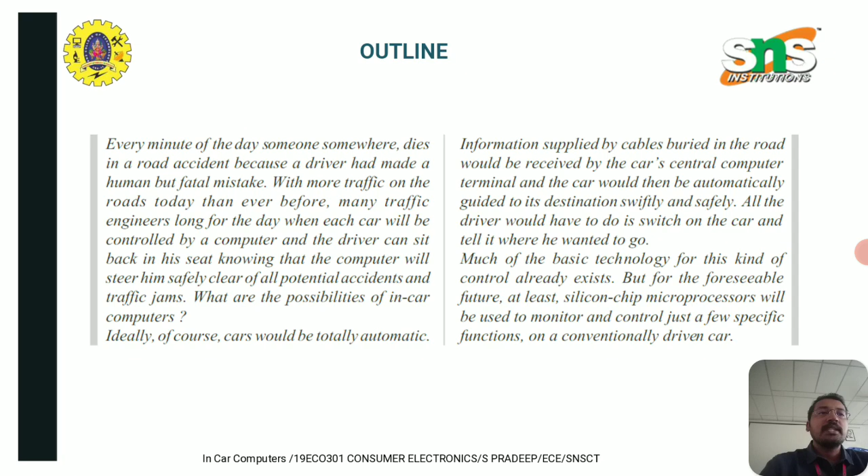Much of the basic technology for this kind of control already exists, but for the foreseeable future, at least silicon chip microprocessors will be used to monitor and control just a few specific functions on a conventionally driven car.

Applications: extended use of integrated circuits will result in electronics taking over more complex jobs in the car's command and control systems. Solid state devices contain no inherent wear out mechanisms. Because of their proven reliability, solid state devices and systems are perhaps the only practical and economical way to realize safety, environmental cleanliness, and the convenience required for state of the art automobiles.

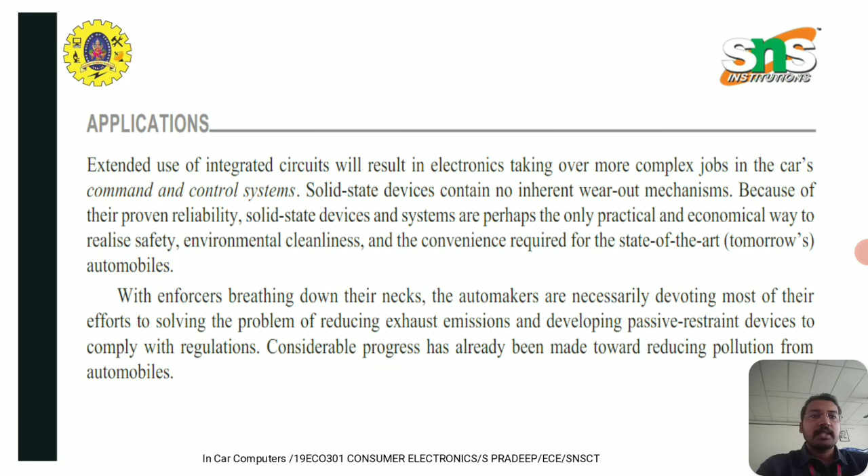Considerable progress has already been made toward reducing pollution from automobiles. This table shows possible applications of solid state devices in automobiles.

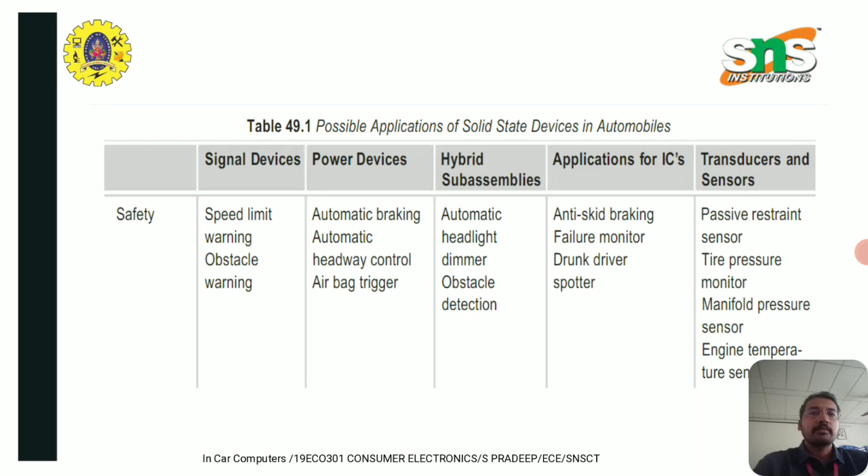This figure shows various items being offered by Ford, though not all of them are available on all Ford cars. The systems shown are all electronic.

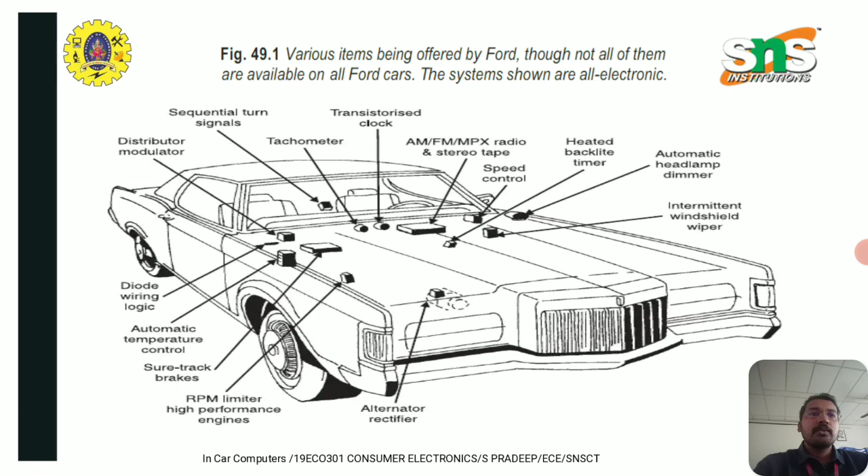This figure shows how a computer might control a car. Sensors are located throughout the car to monitor such things as oil pressure, engine temperature, and the amount of fuel.

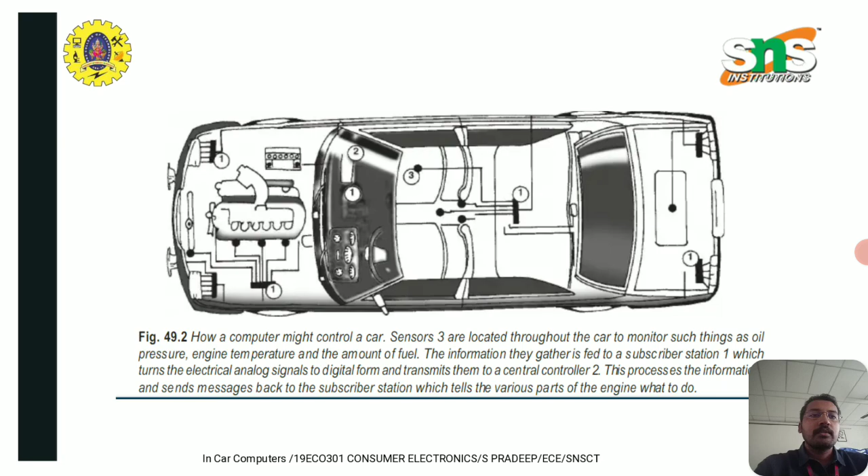A greater difficulty is avoiding the setting up of unwanted oscillations. This is because the control system forms a closed loop.

The brakes send a signal to the computer. The computer sends a signal back to the brakes telling them to ease off brake or brake harder. If the system is designed and adjusted correctly, then the difference between what the brakes are doing and what the computer wants them to do will get progressively smaller as the information and command signal messages continue.

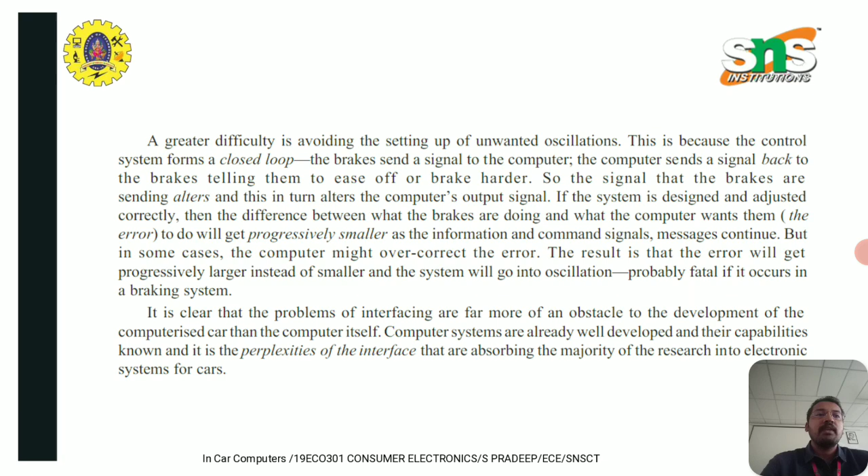But in some cases, the computer might overcorrect the error. The result is that the error will get progressively larger instead of smaller and the system will go into oscillation. It is clear that the problem of interfacing is far more of an obstacle to the development of the computerized car than the computer itself.

Electronic ignition. Development of electronic fuel supply and ignition controls has been given an extra boost by the introduction of strict laws governing the amount of polluting gases that may be present in the exhaust.

Many cars now have electronic ignition. Although most are still timed mechanically, a number of more recent systems has begun to incorporate microprocessors to improve the accuracy with which the ignition is timed to fire the spark plug.

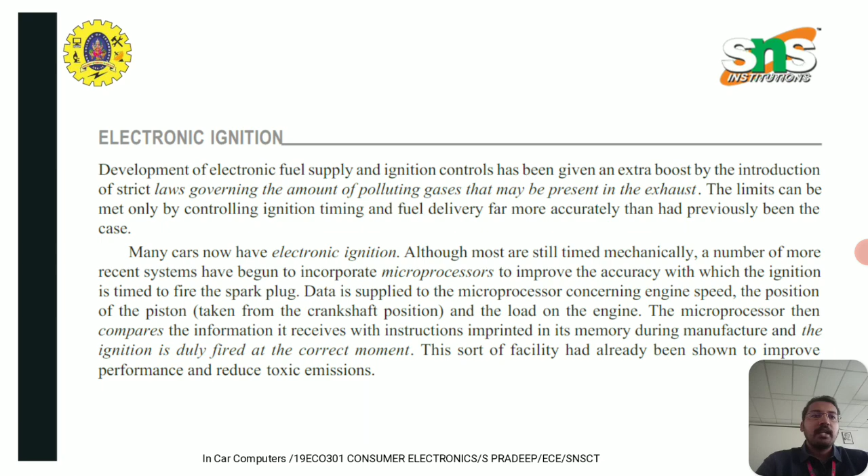Data is supplied to the microprocessor concerning engine speed, the position of the piston, and the load on the engine. The microprocessor then compares the information it receives with instructions imprinted in its memory during manufacture. This sort of facility has already been shown to improve performance and reduce toxic emissions.

Electronic operation of the engine valves opens up a further enormous range of possibilities. It would, for instance, allow the driver to change the characteristics of his engine at will. At the flick of a switch, he could change the car from a highly tuned sportster to an economical slogger with plenty of pulling power, simply by altering the time and duration of valve opening.

Electronic ignition lock system. In the electronic ignition lock system, to prevent drunken driving, the basic idea is to flash an arbitrary sequence of letters on a screen very briefly and then require the driver to punch a set of buttons in the same order.

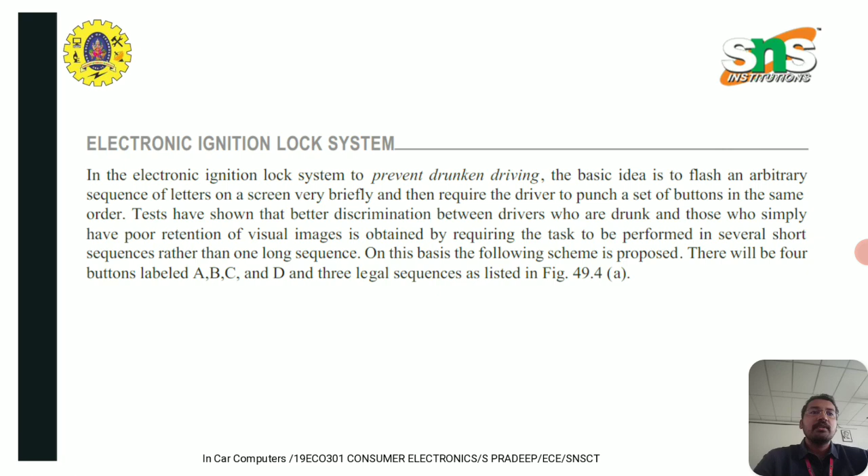Tests have shown that better discrimination between drivers who are drunk and those who simply have poor retention of visual images is obtained by requiring the task to be performed in several short sequences rather than one long sequence. This shows the example.

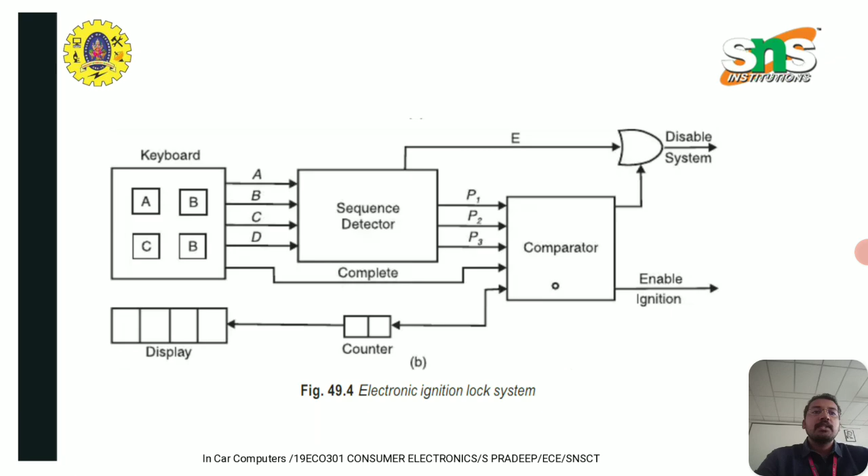This block diagram shows the electronic ignition lock system. In this, the sequence detector checks the sequence. If an error is made in any sequence, the error signal E is used to disable the system.

If a sequence is correctly completed, a pulse is issued on one of the lines P1, P2 or P3 corresponding to sequence 1, 2 or 3 respectively. The information is compared by the comparator with the number of the sequences that was displayed. If they agree for sequence 1 or 2, the counter is stepped to the next number to start the next sequence. After agreement on sequence 3, the ignition is turned on.

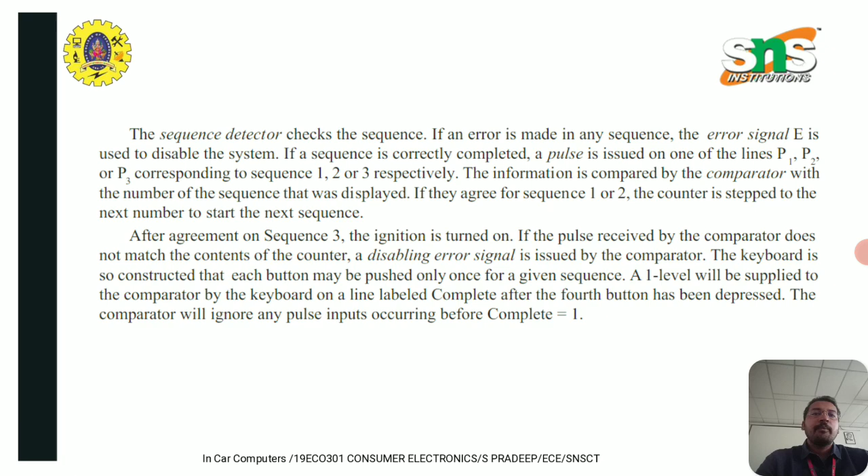If the pulse received by the comparator does not match the contents of the counter, a disabling error signal is issued by the comparator. The keyboard is constructed so that each button may be pushed only once for a given sequence. A 1-level will be supplied to the comparator by the keyboard on a line labeled complete, after the fourth button has been depressed. The comparator will ignore any pulse inputs occurring before complete equals 1.

Anti-lock braking system. The ABS is an advanced braking system which comes into play when there is a panic brake situation. The braking action with and without ABS is shown in the following figure.

In Case 1, when a part of the car without ABS is on a slippery surface and the brake is applied, the car swirls. The car with ABS stays on course. In Case 2, while taking a curve, the car without ABS goes off course while the one with ABS stays on course.

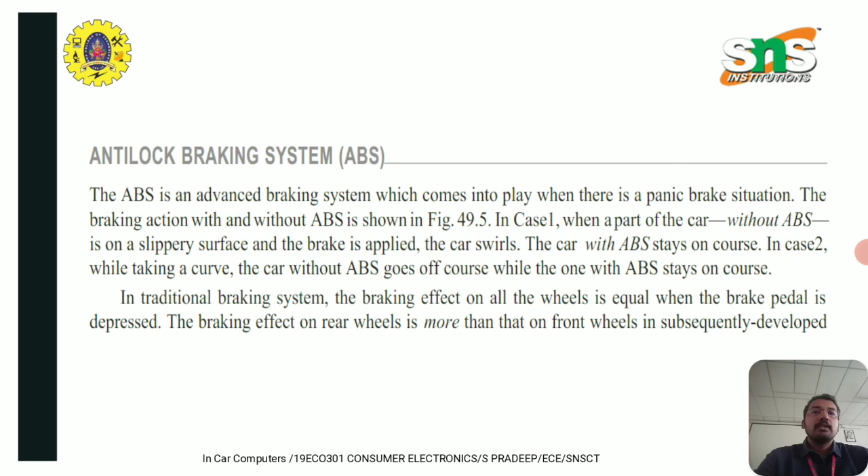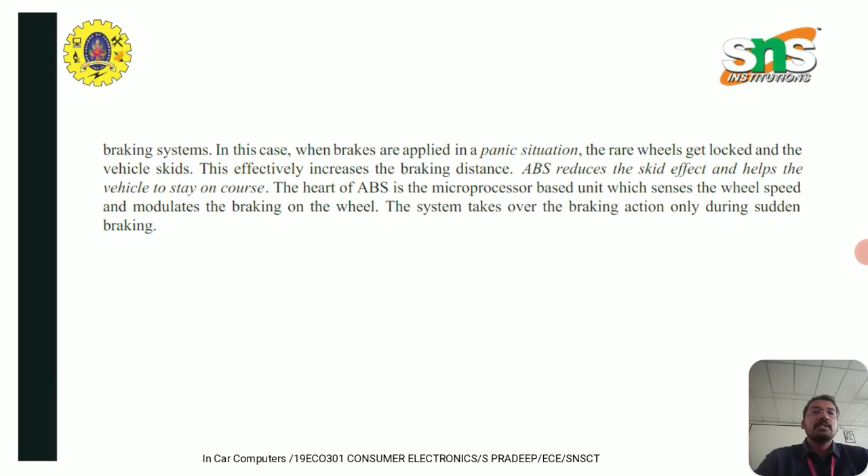In this case, when brakes are applied in a panic situation, the rear wheels get locked and the vehicle skids. This effectively increases the braking distance. ABS reduces the skid effect and helps the vehicle to stay on course. The system takes over the braking action only during sudden braking. The figure shows the ABS and without ABS.

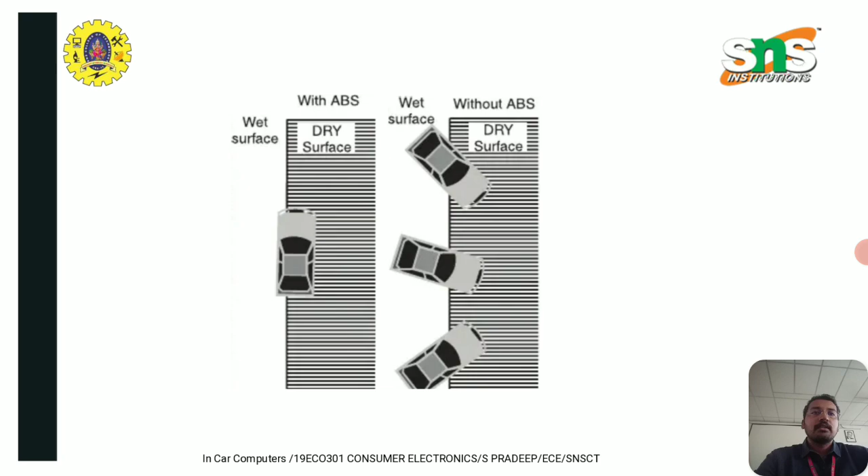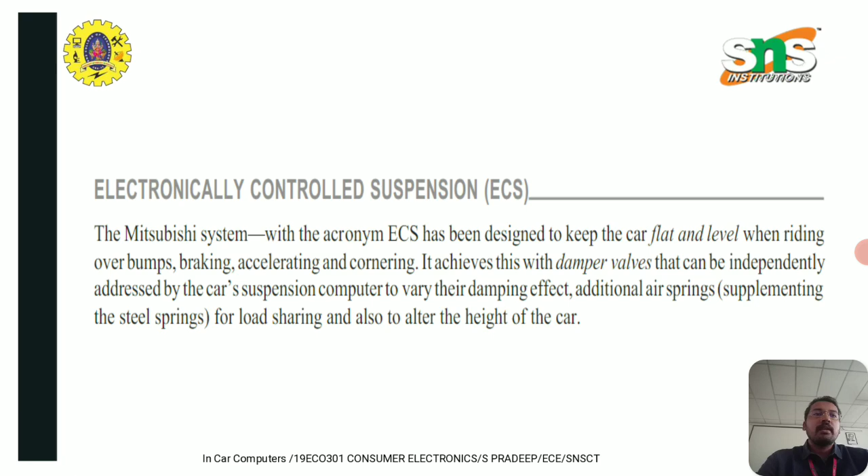Electronically controlled suspension. This system has been designed to keep the car flat and level when riding over bumps, braking, accelerating and cornering.

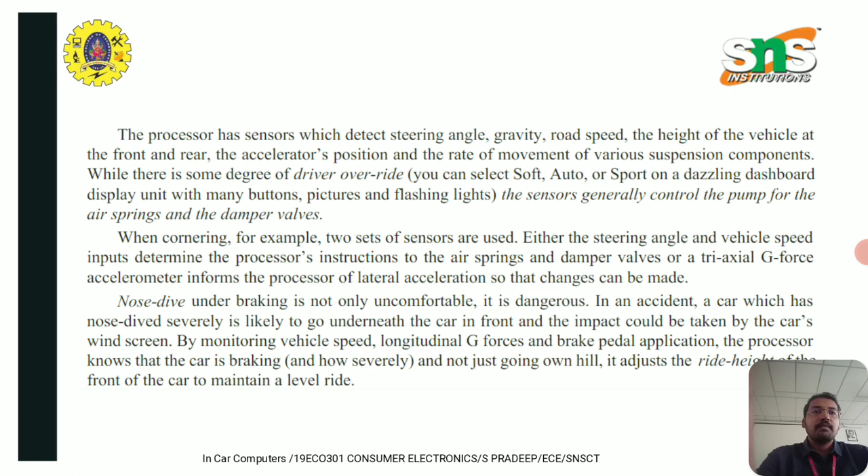When cornering, for example, two sets of sensors are used. Either the steering angle and vehicle speed inputs determine the processor instruction to the air springs and damper valves, or a triaxial G-force accelerometer informs the processor of lateral acceleration so that changes can be made.

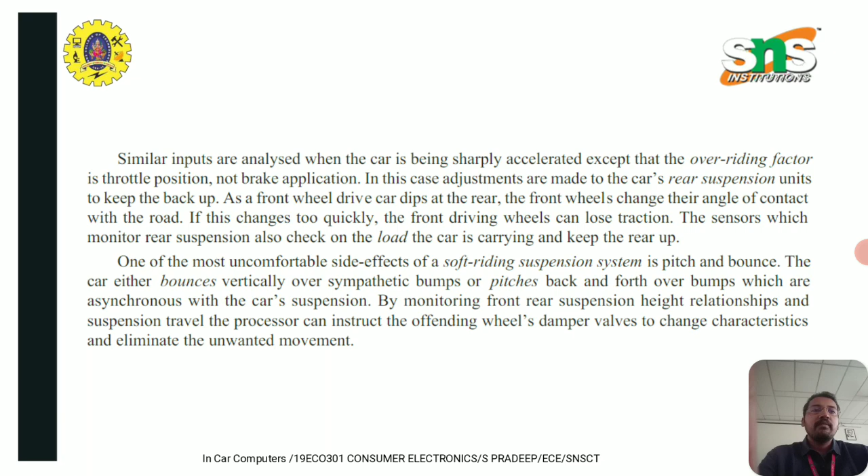One of the most uncomfortable side effects of a soft riding suspension system is pitch and bounce. The car either bounces vertically over sympathetic bumps or pitches back and forth over bumps which are asynchronous with the car's suspension. By monitoring front-rear suspension height relationships and suspension travel, the processor can instruct the offending wheel's dampers to change characteristics and eliminate the unwanted movement.

Instrument panel display. Instrument panel displays in the form of instrument clusters act as an information source for the driver. Instrument clusters usually display parameters like speed, RPM, fuel level, coolant temperature, distance traveled, trip meter and various alarms as individual displays.

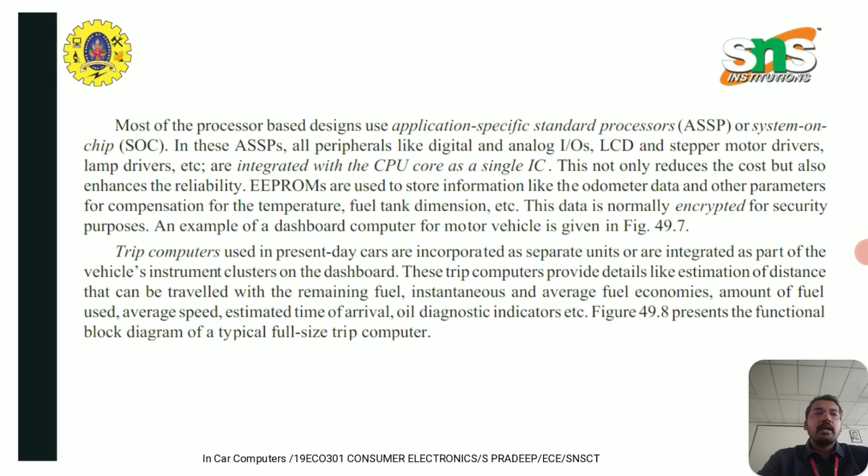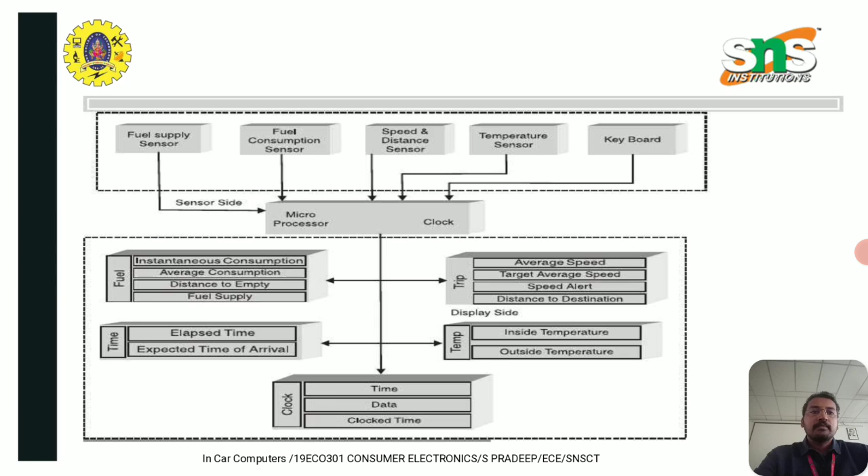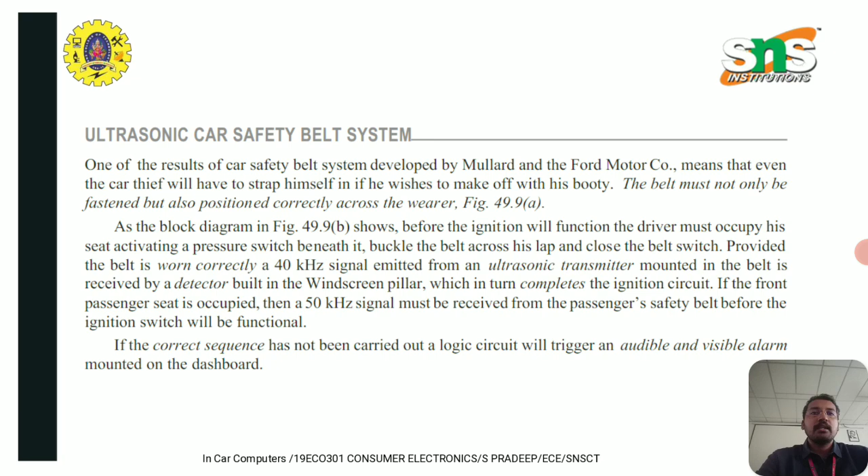Ultrasonic car safety belt system. One of the results of the car safety belt system developed by Mullard and the Ford Motor Co. means that even the car thief will have to strap himself in if he wishes to make off with his booty. The belt must not only be fastened but also positioned correctly across the wearer.

Figure shows the block diagram of the car safety belt system.

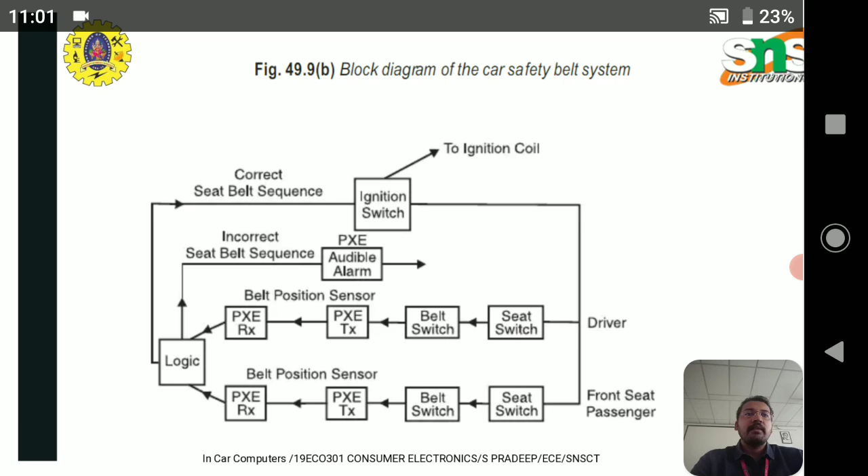Airbag system. The system prevents the driver and front seat passenger from crashing against the steering wheel and into the windshield.

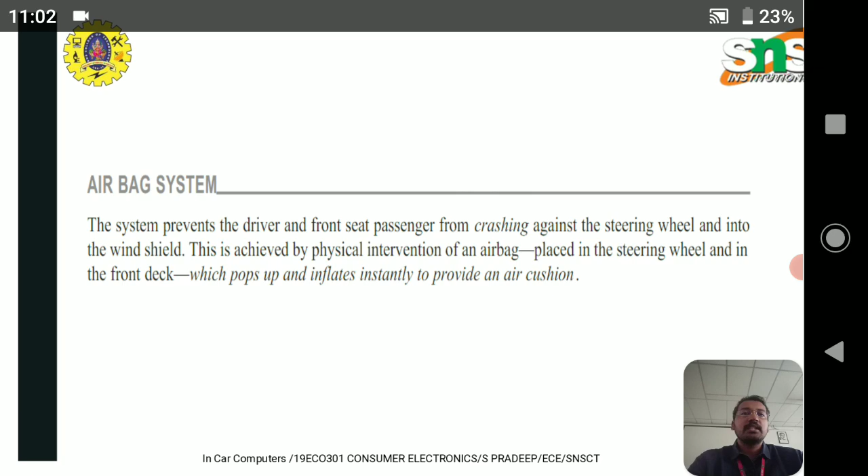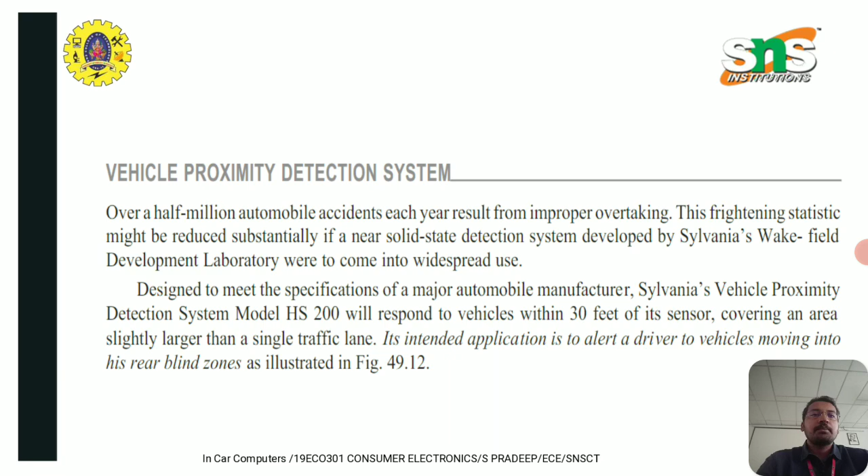Vehicle proximity detection system. Over 500,000 automobile accidents each year result from improper overtaking. This frightening statistic might be reduced substantially if a near solid state detection system is developed.

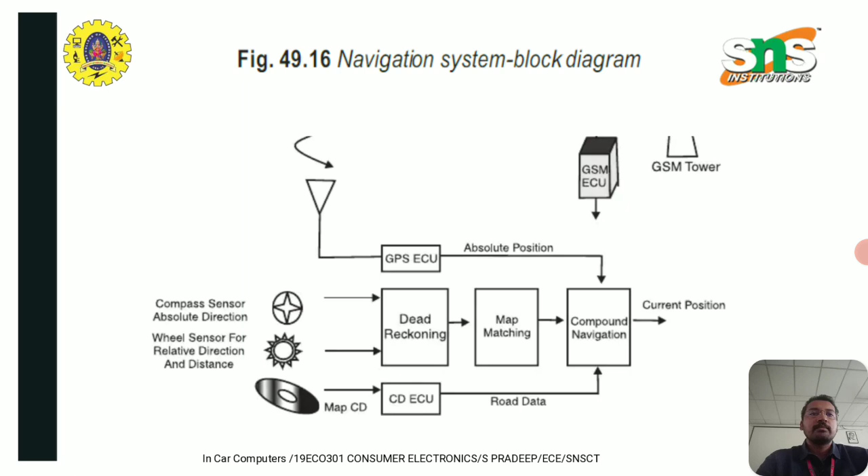Figure shows the navigation system block diagram. Navigation system block diagram.